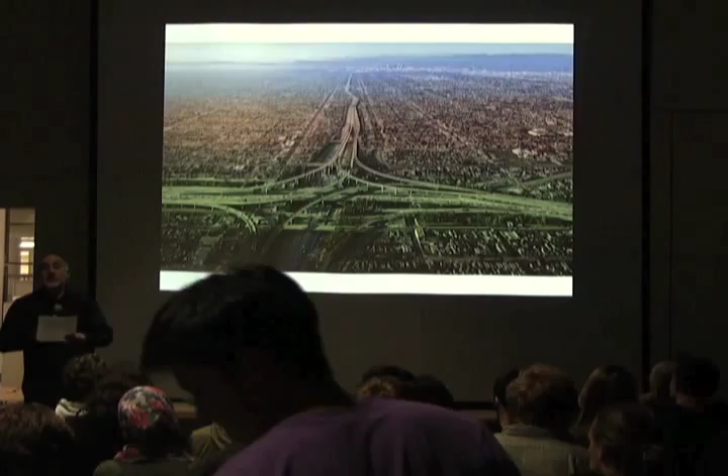The move to LA was a surprising one, but actually a very powerful first step in an amazing career that unfolded since then, and that still draws from the energy of the city, but gives it back much more. There are very few architects today who are able to work effectively with the same powerful hand at such a vast range of scales. Some are good at small, and when they get big, they treat their big as small. Michael treats his big as big and small as small, but his hand is evenly strong at both. LA gives him this variegated ground for the scalar juxtapositions that he masters very well. There are also very few who are able to assimilate into their work a complexity of cultural inputs, from sculpture, painting, but also the practices of walking, driving, seeing, and being seen. And I know there's a lot of that going on in LA. While asserting the primacy of architecture as a framework that holds all this together, not in a hegemonic way, but respectfully and playfully engaging. You will see that.

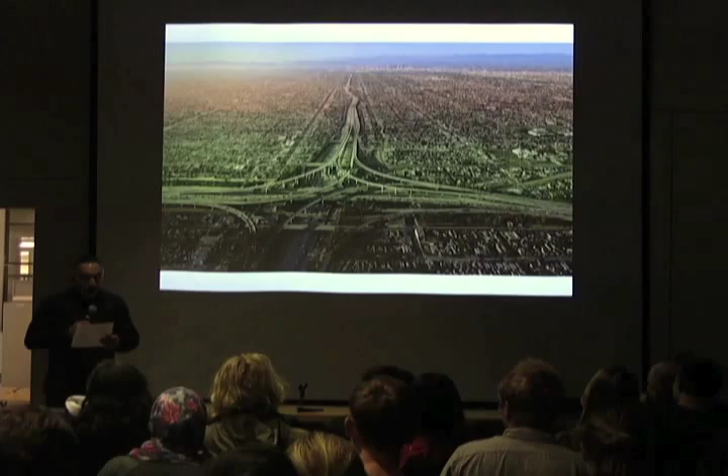The drivers and surfers that are part of that culture see the world differently, and Michael's buildings wink right back at them. There are also very few architects who are able to find room and expression for civicness in all their projects. The way he embraces and highlights and lets the public realm cut through his ground floors and sometimes go higher, and please keep an eye on his beautiful sections. And to find possibilities of civic engagement in a parking ramp or a fence around a schoolyard are always very unexpected and invariably stunning. So for all of this great work, we forgive you the move to LA and welcome you back to MIT.

Thank you, Hashim. I promise all of our secrets are safe.

The idea of this lecture series was a very compelling one to me, the idea of asking the question in architecture of where centers are, if there are centers anymore. To a certain extent, my move to Los Angeles was to get away from a center at that time and to find a city in which the idea of center was very much a challenged one. I would certainly argue that Los Angeles on the question of center is an ongoing discussion, ongoing battle.

That idea of the range of architectural practice continues to be of significant interest, a real driver in my work. In fact, I think for contemporary practice, I'd say I'm most interested right now in range. That architecture, while it possesses incredible, extraordinary capacities towards specialized knowledge and abilities, in many ways, my interest is in architecture's ability as a discipline, as much as a practice, to expand its context, its building types, the forms of its work.

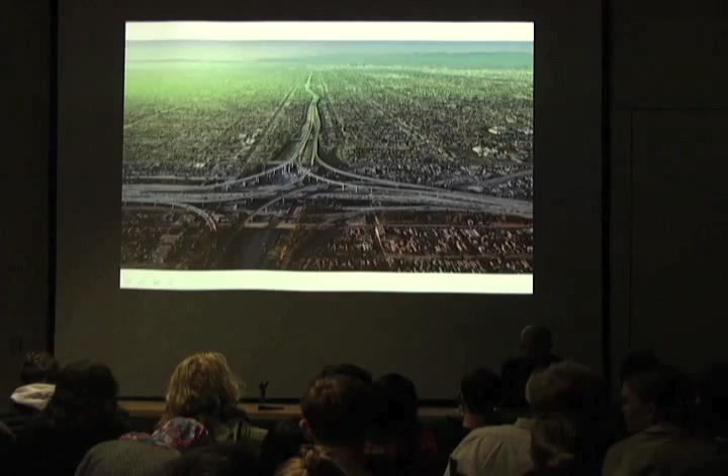I've come to believe that architecture's ability to move beyond the singular building to the scale of master plan, to the scale of landscape, and in some ways to the scale of the social and political engagement of the discipline itself, that in that move, architecture continues to have a very real, challenging, productive and optimistic role in culture today. In that sense, I would say that while I'm still very much interested in contemporary form in terms of what we do, I think I'm even more interested right now in the form of contemporary practice, in its elasticity.

We've been working over the past number of years with a group called the Skid Row Housing Trust, building permanent supportive housing for mostly individuals who are formerly homeless, in an area of the city that's in great transition, the Skid Row district of Los Angeles, which is undergoing extraordinary pressure from almost every direction.

My interest in housing in many ways goes back to my time as a student. Housing was always a significant studio that we took, but even more so, it was that in that typology, modernism, which was something I was very much interested in, had seen as a type the ability to ask many diverse, many complex questions that went beyond form and included questions of social, economic, political engagements. Those mechanisms, which are very much the same types of mechanism that guide the city itself, thinking about collective and community living in the city, makes housing, I think, even more an important typology today.

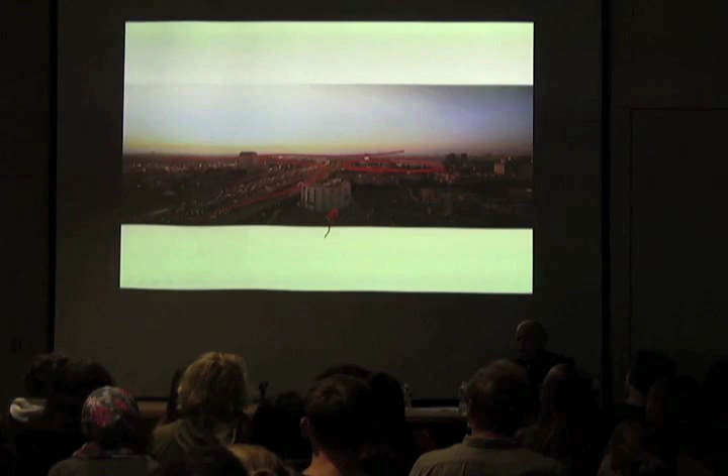If you go back to this image just for a second, this is the building here. This is the 10 freeway going out to the Pacific Ocean, in close proximity to LA Live and Staples Center, which is where the Lakers play, a place that a great deal of the city comes by all of the time. That proximity to the highway, about 30 feet away, was seen as an incredible attribute as opposed to a deficit, because in Los Angeles, our public space is very often the highway itself.

Putting the building in that kind of proximity to the highway meant that immediately you started to create at least a tacit relationship between a community that is largely unseen and the public street of Los Angeles.

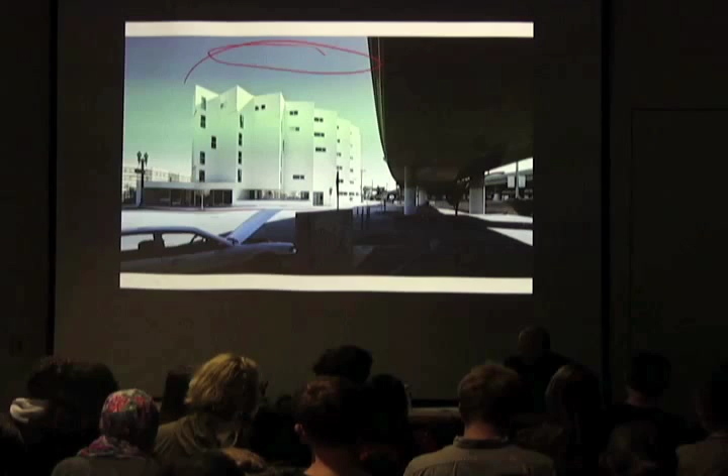That proximity to the highway produced a great challenge, primarily the acoustics on the site, which were so intense that putting housing that close to the highway meant very particular planning for the building. To a certain extent, the shaping of the building, this round form, came from the reality of its proximity to the highway. Working with the acoustician, it became clear that every foot we could get away from the highway meant a drop in the decibel level of the noise we had to deal with. That was important because it meant the construction could get a little lighter, which meant it was more affordable.

But there was another benefit to this proximity, having to do with the visual relationship to the highway, and the shaping of the building into an almost iconic form on the highway, one that related to the sense of movement and motion of the highway. This began to create not only a greater identity for the building, but potentially, in its very form, a tacit conversation between those whizzing by in the car and those people inside the building.

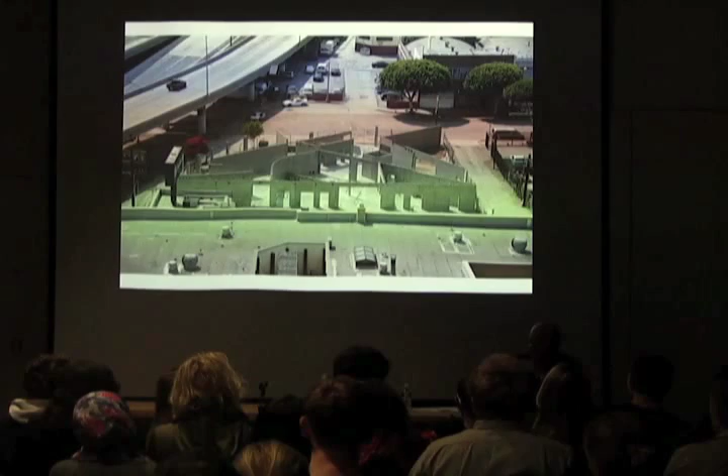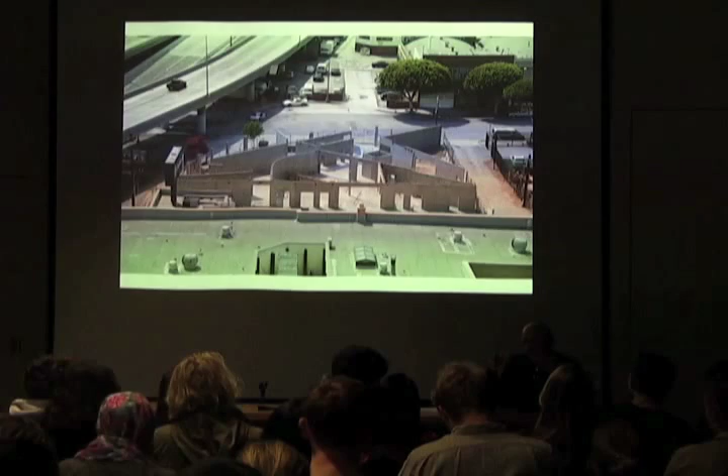I'm very interested in the way infrastructure in the city plays a role, or how its role continues to evolve in a city like Los Angeles. You could say that infrastructure in cities like Los Angeles, which are very infrastructurally marked cities, has tended to do only one thing - getting a car from one place to another, creating some kind of access. But that monoculture of use needs to change. It needs to transform, to take on more responsibilities, given the scale of resources we put into infrastructure, and the scale of the physical impact and footprint it has on a city.

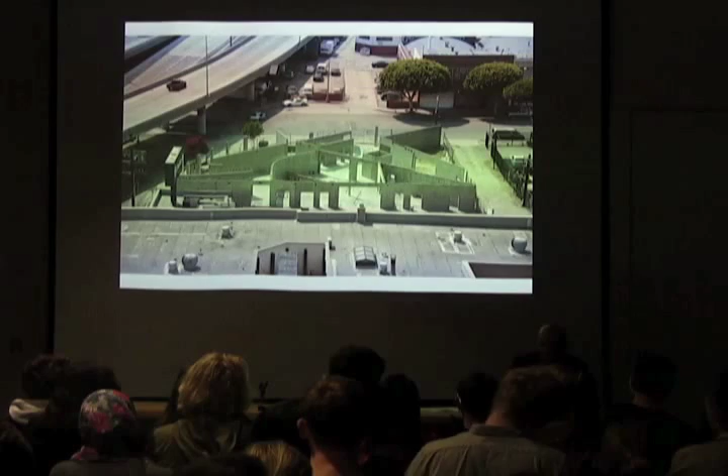Even though this project was separated from the highway, I began to think, maybe even fantasize, that this building, housing, was somehow connected to the highway. It was a bit of an experiment to see if parts of the building couldn't at least begin to insinuate the idea that there was a more continuous relationship between the underneath, underused space of the highway, and the entire ground floor of the building.

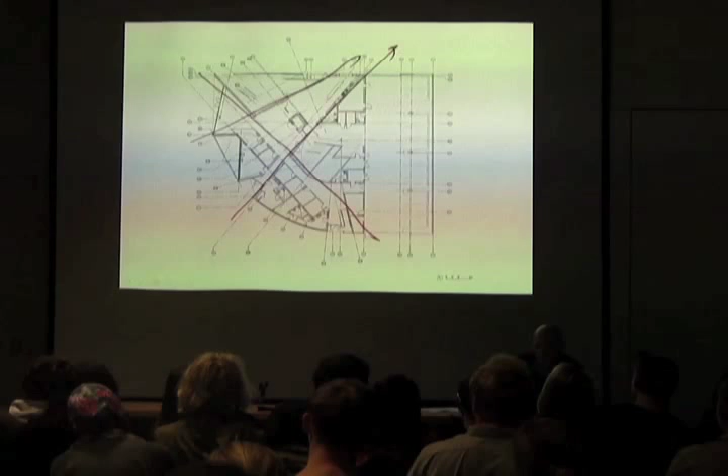The plan of the building is set up so that there are a series of perspective skewers that run through the building, connecting different parts of the site. You can very much see it in the plan - a ground floor that is very different from the upper floor of the drum of the rest of the apartment building, but one that takes its form from these connective views, as if the views through under the highway start to shoot through that ground floor concrete base of the building. As you move up into the building, it takes the shape of its more visible form up above.

All of the apartments, 97 units, are exactly the same - one slice of this serrated pie. They're all studio apartments with kitchens and a small kitchenette on the inside of the courtyard, a bathroom, and then the studio apartment facing outside.

One of the small but consequential inventions in these buildings is that we've moved from a double-loaded corridor, the typical apartment floor plan with apartments on both sides and a corridor in the middle. The problem with this, one of the challenges for this community, is that many people who have been chronically homeless for many years have started to create almost psychological shells around themselves. It's a cruel irony that they've been in public space for so long that the only way of combating that is to create intensely private lives. In the old model, people would come in the elevator, go down the corridor, into their apartment, and you'd never see them again.

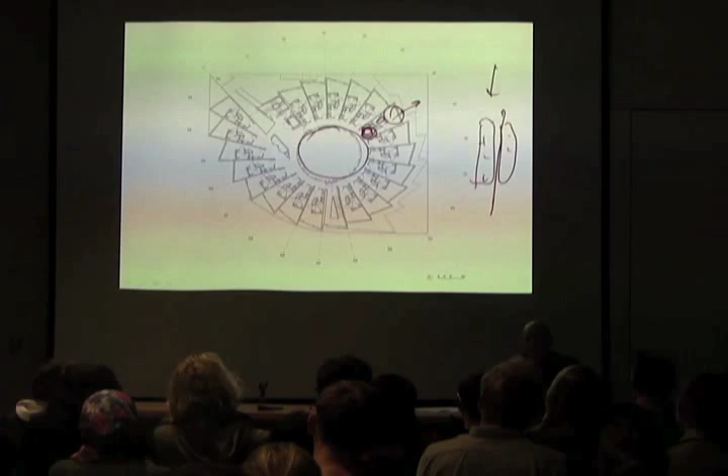What we've done in most of these buildings is crack that open, creating a single-loaded corridor around a semi-public courtyard. So every time somebody comes to and from their apartment, they are, in a sense, navigating a semi-public space, more of a communal space.

While I don't believe that architecture in and of itself changes this deep social dynamic, I think it is one of the ways through planning, that strategic planning, that architecture can play maybe even a more therapeutic role in loosening up that equation.

That inside courtyard space is very much the social heart of the building. At the ground level, there are a series of large stairs that become almost an amphitheater for the community. They do community meetings, they do performances, bands play here. All of the apartments ring around this courtyard.

It's marked by these long fins that were a very important development in this building because the courtyard is so tight, they act a little bit like blinders on a horse, creating more opacity to your next door neighbor when you're inside the corridor, but always allow you to see directly across and connect you to the comings and goings of the community around it.

They also have the effect of, as they spiral up, starting to reflect the light and the color of the sky at the top of the circular form of the courtyard, and animate that courtyard over the course of the day so that its connection to the outside drifts down by that reflected light and color, changing very much the dynamic of the inside of this space and connecting it to the outside, even though the outside of the building in reality is, for a lot of those acoustic reasons, very much an internal set of spaces.

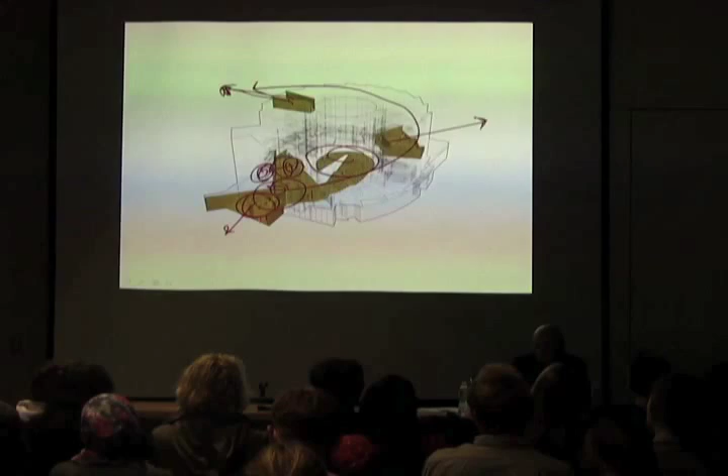With each of these spaces, whether it was the outside lounge, otherwise known as the smoking porch, the TV room and laundry room which face out towards the highway, that center courtyard space, the community kitchen which connects to a ground floor outdoor courtyard space, and then the lobby and meeting spaces directly to the street, each one of them plays a very different role in orienting you away from that internal life of the building back out to the larger community that surrounds the building.

Maybe the most important of those spaces is the TV room and the laundry room. It's one of the places that community constantly goes and spends time. We organized that part of the program at exactly the 30-foot level of the raised highway, as if it's a type of front porch for the building out to the highway.

While in this image it looks like traffic is always moving very quickly in Los Angeles, more often than not, traffic is stopped dead. And it gives that community, in a sense, both of those communities, the opportunity over the course of the day to just see each other.

Again, while I think I'm realistic about the change that a building can make in the dynamic of these larger social structures, that fact of starting to create real visual connection between these two distinct communities is something that I think architecture not only can organize, but also has the ability to start making a subtle inflection in the expectations of what a social conversation might be in the city.

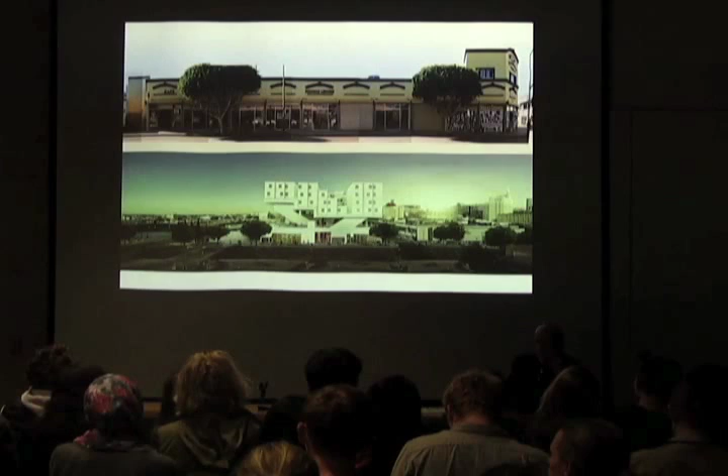They don't want mixed use. You're in the housing business, you should just concentrate on the housing business, and that's all you should do. Because the Skid Row Housing Trust wanted a stronger connection to reinforce life on the street, they wanted to take the very simple measure of putting retail space in the ground floor of the building, and they looked for a loophole, and they found one.

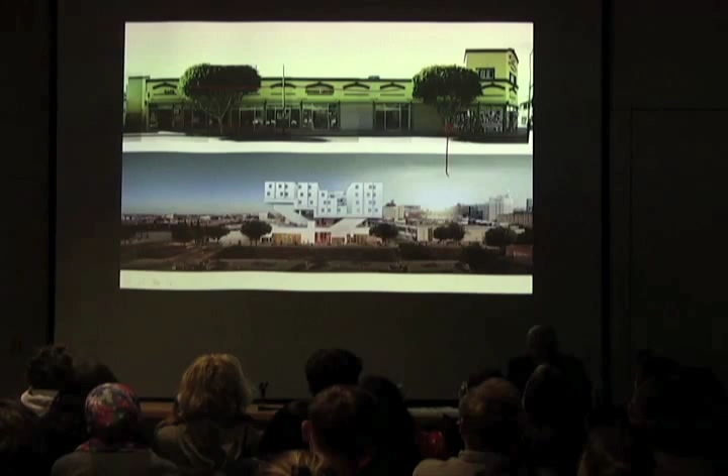The loophole says that if you buy a building that has retail in it, or if you already have a building with retail in it, you can keep that retail going. So they did, in fact, buy a building, which was this one-story, very typical downtown Los Angeles building with parking on top, almost a sacrificial stucco exterior around the outside. Ground floor retail, filled with lots of small mom and pop type shops. This building is a little bit on the edge of the garment district, and some of these shops serve the garment district.

Because of the need to keep that retail going, to fit within those regulations from the housing department, we needed to reuse this building, and you can sort of see it here in this rendering of the project. We did in fact reuse the existing building as the ground floor of the new building.

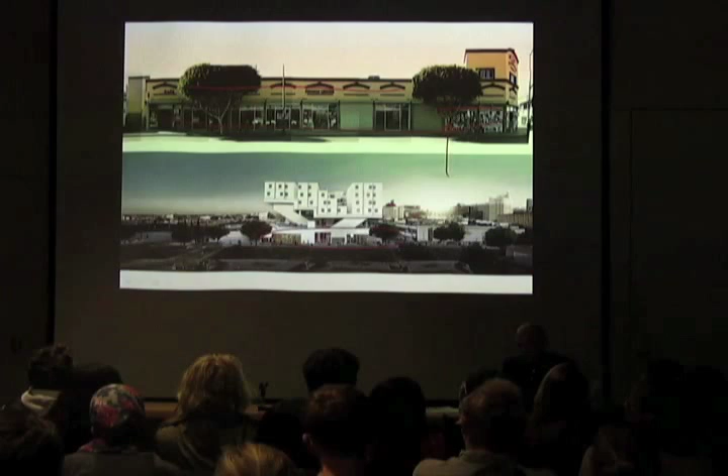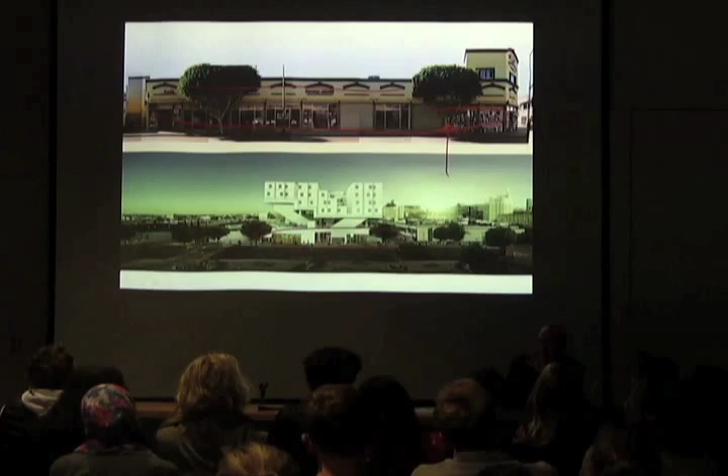That was complicated. It created a number of technical challenges for the building. But this building was in many ways ambitious for the trust at a number of levels, and one of those was not only doing mixed use, but also beginning to talk about a larger question of urban sustainability.

In Los Angeles, this would have been a kind of building that would have been, for the most part, torn down, scraped clean, and you would have built a completely new building on top of it a few years ago. The idea of reusing existing fabric, even existing fabric that seems as incidental as this building, was a big part of the overall conversation of the building.

The second issue that we were starting to take on was this question of density, and what density might look like in a city like Los Angeles, where there really aren't very new models of density.

What I was trying to do in this project was to create almost a kind of hyperdensity within the block. You can begin to see that each of these small towers ring around the courtyard, and there's an additional tower within it, which makes the spaces between the buildings much smaller, much more intimate. You again ring around and walk to your apartments in that single loaded corridor.

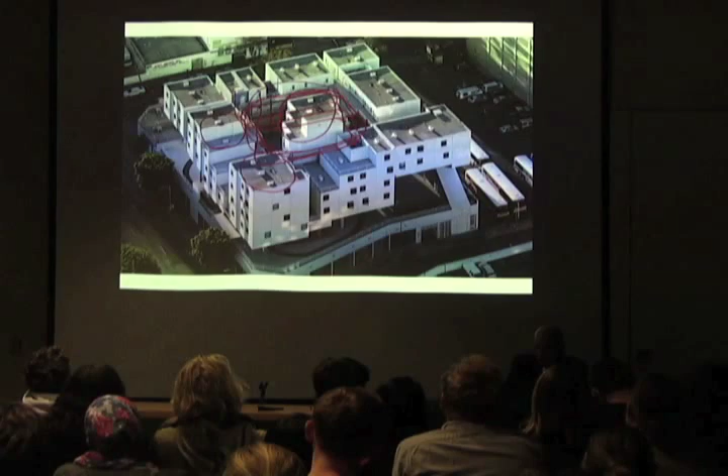Same type of diagram all the way down through the building. But here, as opposed to that central courtyard, you're really in the thick of a dense new type of urban fabric.

Because of that pressure of density and the lack of a more traditional courtyard at the center of the building, instead we started to take that social space and flatten it out into a pancake of different activities on the second floor of that existing building that used to be the parking lot, transforming it into an amalgam of different community activities.

That includes community kitchen, exercise room, recreation room, art classroom, social services offices, as well as a number of outside spaces like half-court basketball, jogging track around the entire perimeter, community garden, yoga, outdoor classroom.

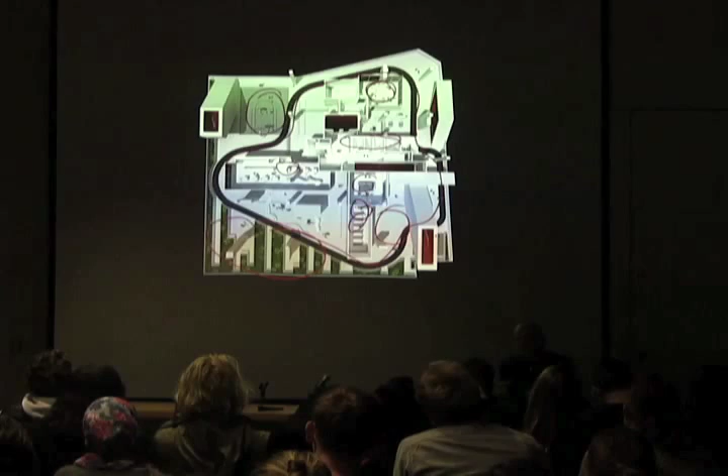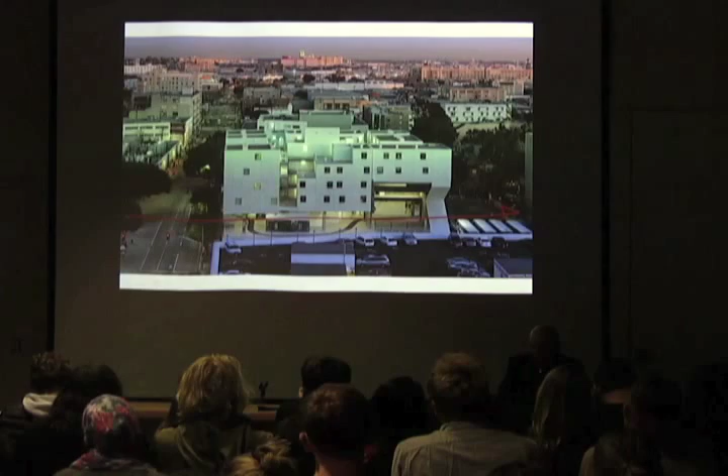That mix of different activities on that second floor of space seems to extend out into this low horizontal district of the city, and into what I think you could even begin to say is that larger continuous horizontal sprawl of the city. This was not only a way of organizing these individual community activities, but starting to see if you could pack them together into a new type of social diagram. In some ways, a kind of microcosm of social activities that started to represent a new dynamic, a new social public dynamic in a singular building.

Because the building was being built on top of another building, and because the site was very difficult to build on top of, we looked at a method of construction that has never really been used in Los Angeles: multifamily prefabrication. There's one other building from the 1960s, about 50 years ago, that used some prefabrication. There are reasons, very arcane code reasons, why prefabrication hasn't been a possibility in Los Angeles, which I'm not going to get into.

But here, we saw it as a huge attribute on a very small site, and a way to stage the construction quickly. All of the units, 102 units, were built in Boise, Idaho, and you can see them coming from Boise here, eventually arriving in Los Angeles. They were built in Boise because we needed to build this building as wood frame construction to fit within certain codes, and in Boise, they do that very, very well.

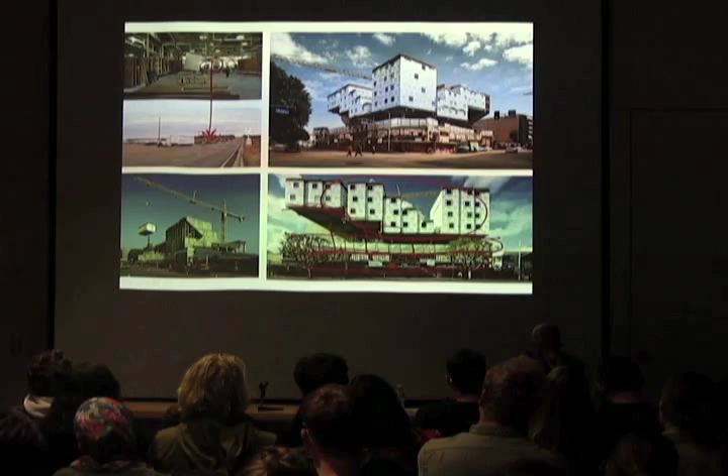Stacking all of the units, once this concrete tray—which was poured and built over that existing building and over that new public or semi-public recreation deck—all of these units were then lifted into place in about four weeks. The units are all very much the same, very utilitarian, but for this community, the fact of having literally a kitchen or their own bathroom space are huge changes in their life.

The building, which you can see here, the ground floor retail is starting to fill in. Its life on the street is very much starting to become an active one. That second layer is starting to become a very active part of the community within the building, and the apartments have all been occupied for a number of months now, very successfully.

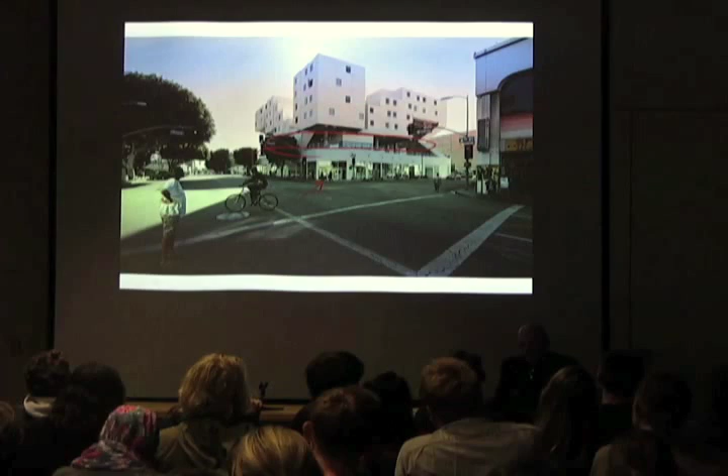This building and its relationship to the city is, for me, one idea about creating a more complex amalgam of parts, to begin to represent and start to experiment with how architecture can be, in a sense, almost an urbanism in and of itself. But the scale of this project is still very much at the scale of a single building. We recently completed a building which starts to take many of these same questions and challenges them more at the scale of the city itself.

One Santa Fe is a mixed-use project, in this case a private development, for-profit developer development. It has 440 units of housing, and the entire ground floor is retail, about 75,000 square feet, along with a great deal of parking as well.

It's in an area of the city not so far from Star Apartments and Skid Row and downtown, but in a very different condition—not so much in the middle of the city, but much more at the threshold of the city as it develops. This whole neighborhood is called the Arts District. It's a warehouse district that contains slightly larger, loft-like buildings that much of the creative community in Los Angeles has lived in over the years.

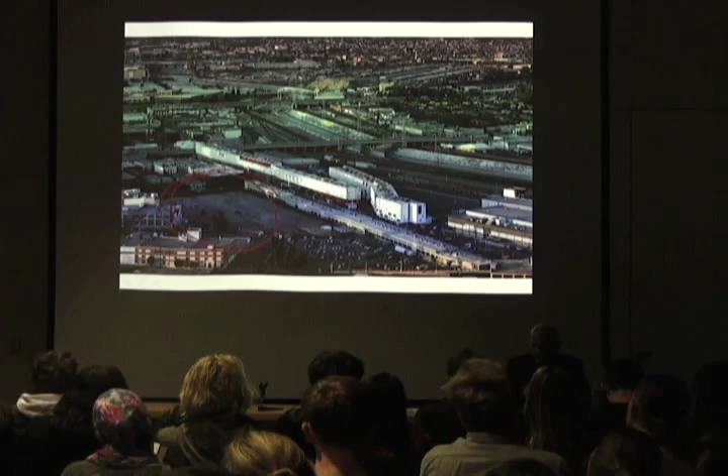It is immediately adjacent to the Los Angeles River, which is undergoing, or about to undergo, a significant revitalization in partnership with the Army Corps of Engineers. It's just across the river from East LA, which is the heart of the Latino community in Los Angeles, which is now the majority community and very powerful politically in the city.

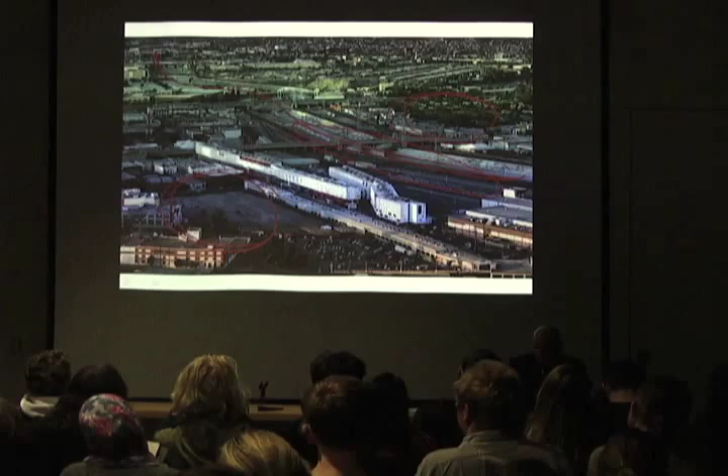As an aside, it's right next to SciArc, another architecture school, which is a long, skinny building. The site that we were given—this is just an image to give you a sense of the scale, and also to reinforce the fact that I've always wanted to do a skyscraper but never gotten a chance. So if you tip it up on its side, it's, I think, the 7th tallest building in the world.

This site is really marked by the fact that infrastructure has been the thing that has created the grain, the scale, the image of the city. SciArc, which is here, was formerly the longest building, I think, in the city—it's an old rail depot from the Santa Fe lines that ran through this part of the city.

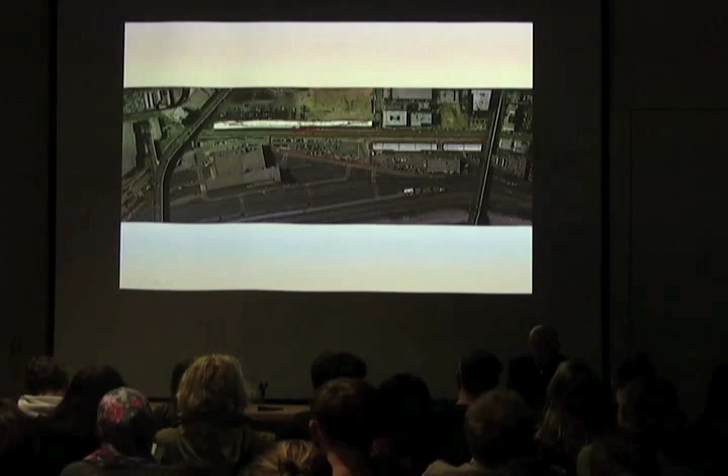There's still an incredible number of rail lines, including the MTA lines, Amtrak, and Union Pacific, amongst the different rail companies that run through this part of the city, as well as the 1st Street Bridge to East LA and the 4th Street Bridge. That sense of the long and linear structure to the city certainly gave rise to some of the form of the building.

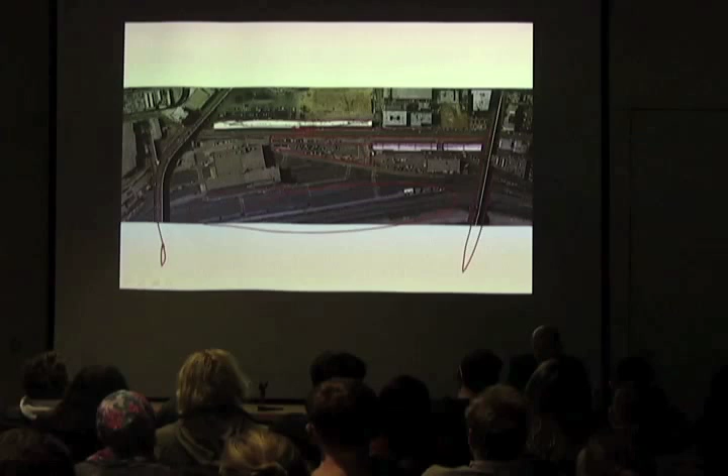But much of it came from just the fact of the unusual configuration of the building—a little bit wider to the south, and then very, very thin up against this maintenance building, which needed to remain as an adjacent neighbor.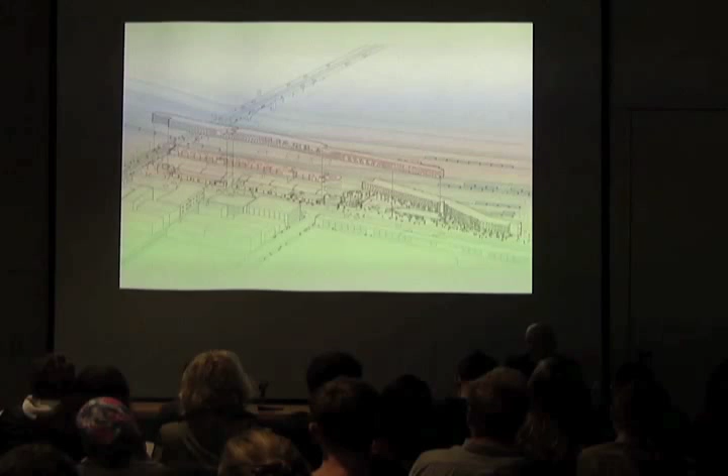The diagram of the building, the planning strategy, is very much a layered or sandwich-like vertical disposition of the different programmatic layouts.

At the ground floor, as I mentioned, it's almost all mixed-use retail that stretches from the First Street Bridge on.

On the second level, on the northern part of the site, because we couldn't build the parking underneath adjacent to that existing maintenance building, there are two layers of parking sandwiched in between, so they float up above and are accessed by these large spiral ramps, which start to create markers as you come down either First or Third Street. Then housing up above, either 5 levels to the south or 3 levels above the parking.

One of my thoughts in this project, which came in many ways from the previous project, Star Apartments, was that in developing densely in the city, there are many ways of going about it. Certainly you can build up in that skyscraper or tall building scenario.

But maybe there's also a way of thinking of the city when it's more horizontal, building over that lower grain, in a sense creating a kind of palimpsest or additional layering that ties the city together in a very different way.

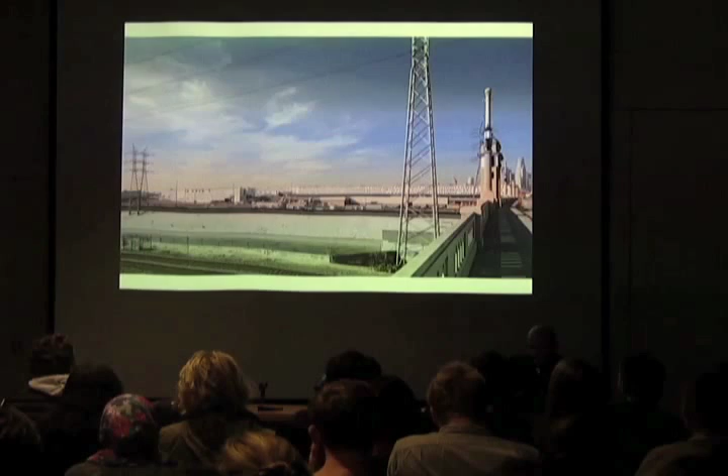But as you look back to the building from the other direction, across the river, across the rail lines, across the power lines, it has a very different, almost industrial quality as well, and its full length starts to become much more apparent.

At the ground level, at the street level, you can see the parking above. There's just a sense of the retail here. Much of the retail in these photographs is just getting built out. The building is, as I mentioned, just being completed, ground floor all the way down the street, SCI-Arc on the right-hand side, and then the apartments that slice over the top of it.

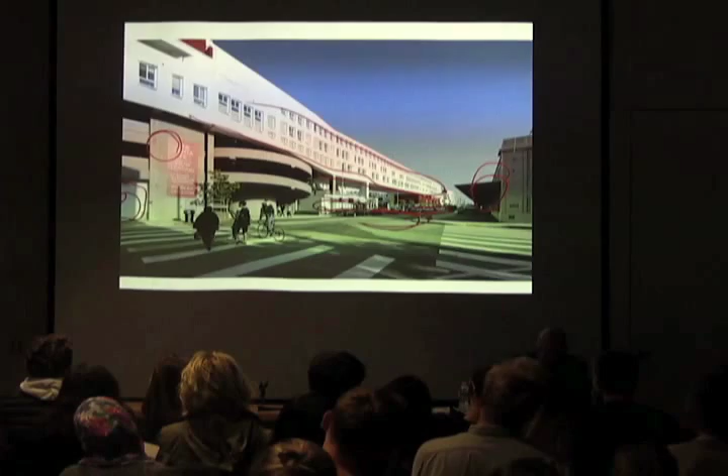There is an important portal where the building turns, not so much a building that hits the ground, but into more of a bridge that creates an opening from the street into these internal courtyards, where the scale of the building starts to change to a more meandering movement transversely down through the building.

Again, where the ground floor retail takes place, you can see out to SCI-Arc. SCI-Arc, in a sense, almost completes the urban wall of this interior space.

And then a parking lot at the ground floor, which is a flexible parking lot. At times, parking can also be used as a central plaza for the complex.

It's another view of how the scale of the building begins to change or break down into a finer grain, including through these balconies and passages to the surrounding neighborhood.

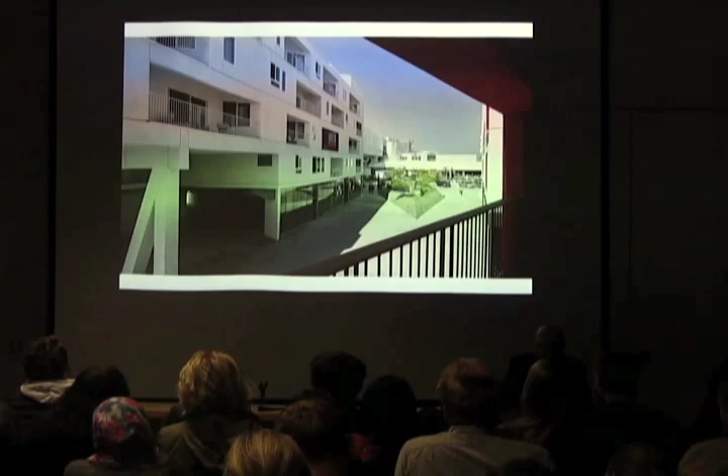Maybe, while the scale of the building at the city level is certainly at a visual level one of the most insistent things about the building, but maybe one of the...

...most important things about the building is the diversity of apartment types and scales of apartments that it sets up. We were trying in this building to create as much diversity to the community that would live there as possible. And there are many ways of doing that, certainly economically.

There's been a conversation about how you integrate affordable housing into apartments. Here we were literally trying to do it with the scale of apartments themselves, everything from smaller micro studios to very large 4-bedroom units, with 2, 3, and 1-bedroom units in between.

And that range, that diversity of different units, while unusual in a typical developer building, has allowed for individuals, groups of individuals, students, to find inventive ways of creating relationships to rent these apartments, including some of these 4-bedroom units where 8 people have gotten together to live in them. There are some units in the bridge which are more of a skip-stop configuration, similar to Corbusier's Unité units, where there's one corridor down the middle, and then you come in and either have a 1.5-story unit up above or down below.

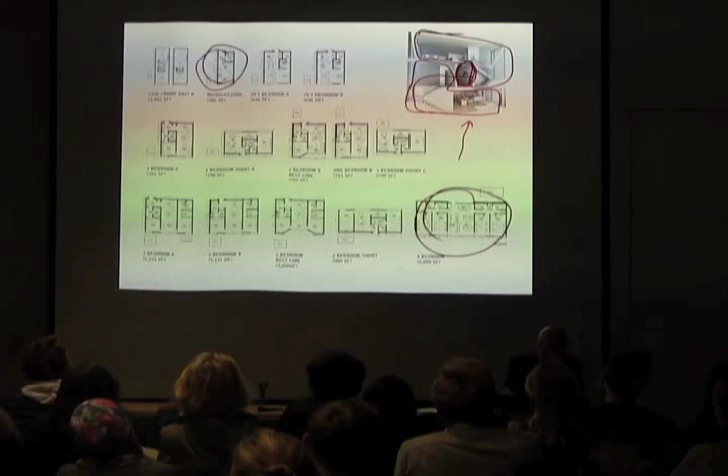The advantage of these units is that you're able to see through both sides of that bridge from downtown all the way to East Los Angeles. That bridge creates a very strong gateway into the middle of the building.

But our ambitions here were not to stop in the middle of the development. The ambitions of this building as more of a threshold building, as a kind of gateway to that emerging development of the river, and potentially connecting all the way to East LA at some point, was very much on my mind as we were beginning this project.

We developed a conceptual set of bridges which at the time seemed preposterous, all the way to the river, but now with the development of the river it's starting to be revisited.

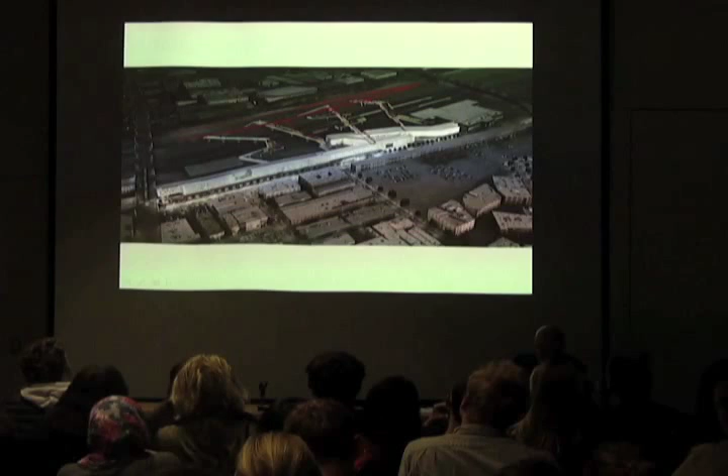And here's a point that for me is very key to this project, and that's a question of anticipation. We've been criticized at some level, not too much in this project—it's been received very well in general—but there has been some criticism that the project is too big for this part of the city, and I understand that criticism.

At the same time, much of what we were trying to do in this project was to create a kind of anticipatory scale, a scale of the building that was not trying to meet the city where it is today, because in a city that is developing as rapidly as Los Angeles, to meet the city today likely means that tomorrow you've missed the change in the city.

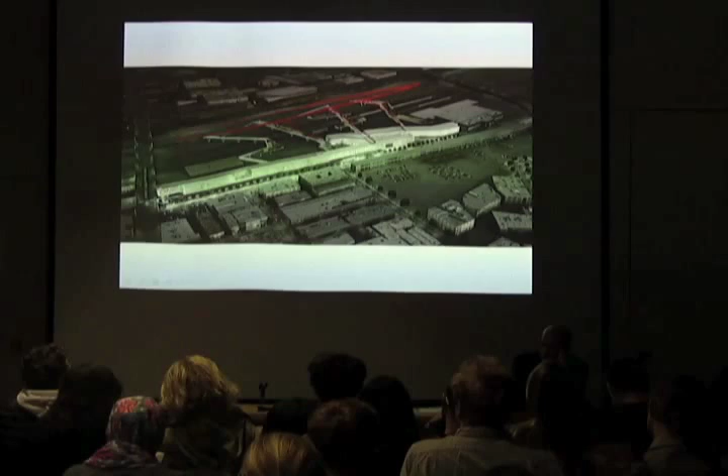But in fact, to meet the scale of the city in 10 or 20 or even 25 years is, I think, a responsibility in architecture—to not only plan for how a building relates to a particular context now, but to understand architecture, especially in the city, as a component of master planning for the long term. That architecture will, over the course of its life, have a changing set of relationships as the city builds around it.

And even all of these projects I was mentioning—whether it's Carver Apartments, Rainbow Apartments, all of these little dots, and the Sixth Street Bridge project we're doing—over time, beginning to understand them not as individual projects but almost as a web of relationships that builds up over time, is quite interesting in thinking about larger planning in the city. People often believe that projects like the Staples Center or Convention Center are going to, because of their large gravitational scale, save the city.

They're going to change the city for the positive just because of their bigness, that they have so much influence in the city that they will ultimately change it for the better over time. And maybe that's true, but just as often those projects miss the way that the city is developing.

What I've really begun to think is that not only is the scale of a development like One Santa Fe important, but these types of webs of relationships and the scale of a project based on the accumulation—the iterative or temporal accumulation of all of the parts—has just as large, if not an even more beneficial, role in the city.

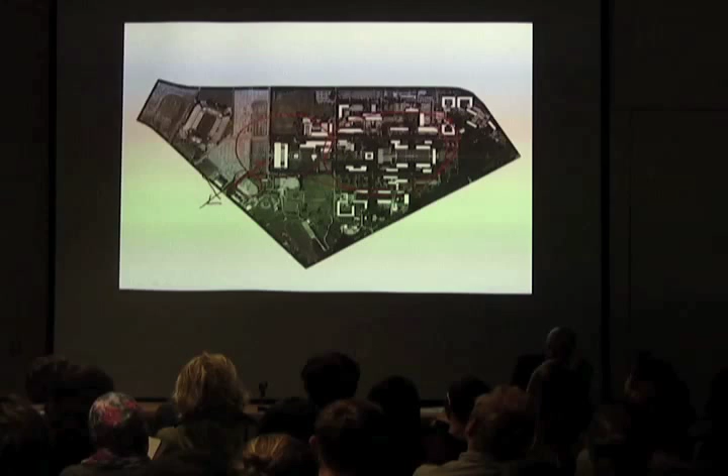We're working on a project that takes some of these same ideas and begins to revisit them in a single building, but in a very different context. That's a project called the Moody Center at Rice University in Houston. The Moody Center is going on the edge of the more traditional campus of Rice University, at a gateway into the campus, which is increasingly becoming one of the major gateways into the city as the development of the campus moves more in this direction. The Moody Center is a new type of program for the university.

It's not one department that will run this center, but it's meant to be a truly interdisciplinary building. Rice University believes there is great promise in bringing together many different disciplines from around campus and outside of it, in the city of Houston as a whole, institutions like the Museum of Fine Arts and other universities, curating these different groups and giving them space to make projects over the course of a semester, a couple of weeks, or a year. This building is taking the energy from many different intellectual centers and trying to bring it together, equivalent to the campus as a whole.

We took that idea and imagined, almost fantasized, that if you collapsed all of the buildings of Rice, squished the public space, quadrangles, and open courtyards together, you could begin to think about the engineering department, the art department, and the international studies department clipped together to become the building itself. Rice is marked by long, linear, bar-like buildings, so the Moody Center becomes a series of these longer linear forms that relate in scale to the existing buildings at Rice.

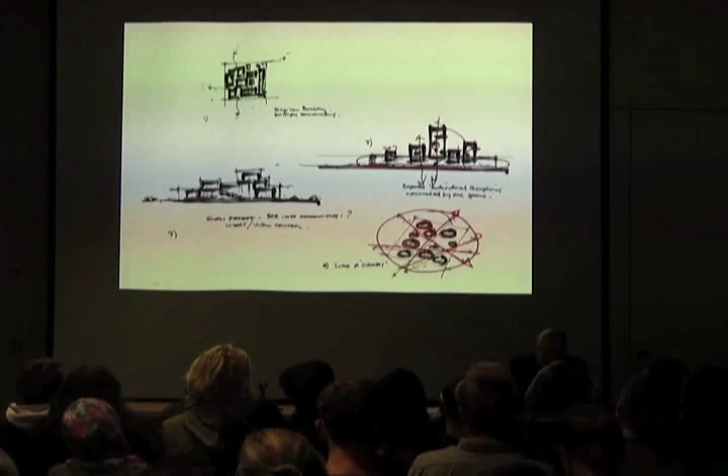There's something important too: the campus of Rice flows to this part of the building. I started thinking about whether the ground plane, the landscape of the university, could slide under all of these buildings, creating a relationship vertically as well as horizontally. That ground floor, with these different intellectual centers, could be both transited, as if the campus had a very open, porous relationship to the building, as well as denser, floating up above.

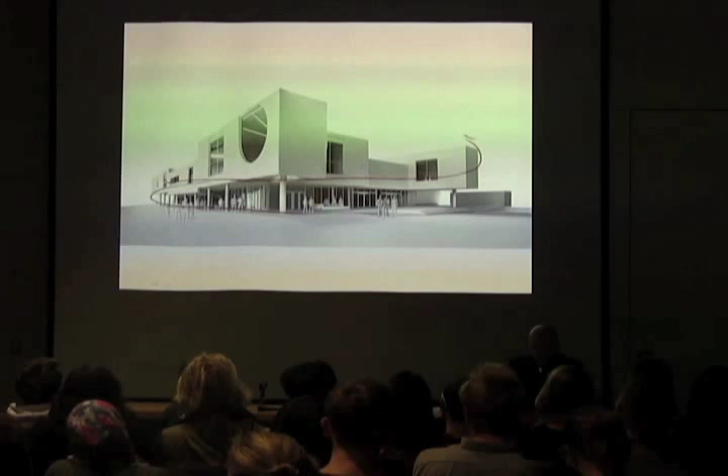We started with a series of collage diagrams showing historic photographs of learning and engineering spaces on campus, with oak trees very dense up above and very open and visible down below. The building is quite literally the equivalent of that: a denser building up above with a completely transparent ground floor at the level of the campus.

One of the requirements for this building was that the entire campus is brick, and I'll talk about that more—this is the first brick building we've ever done. So there's a very strong separation between this heavy, dense brick series of forms above and the lightness of the ground floor.

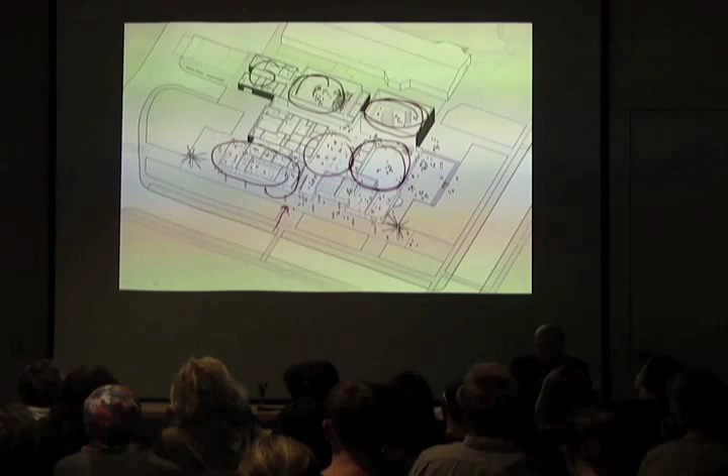This is the axonometric of the ground floor, giving you a sense of the very different types of program: a gallery run jointly with the Museum of Fine Arts in the city, a flexible student-run gallery, larger studio spaces, a 99-seat black box theater with some back-of-house spaces, and this entire wing, all glass, containing more traditional shops as well as digital shops—everything from woodworking and sewing to metallurgy and three-dimensional digital fabrication.

As you move up into the building, some spaces are quite tall—double height, triple height—and then smaller, more intimate classrooms and office spaces, with medium-sized offices above. If you peeled away the outer skin, the inside is almost a three-dimensional topography of different open and closed learning spaces: large studios, a flexible gallery, and connections above, including in this case a large stair that can be used as a teaching classroom in itself.

Here's an interior view of that space, showing the range and different feeling of the interior classroom spaces.

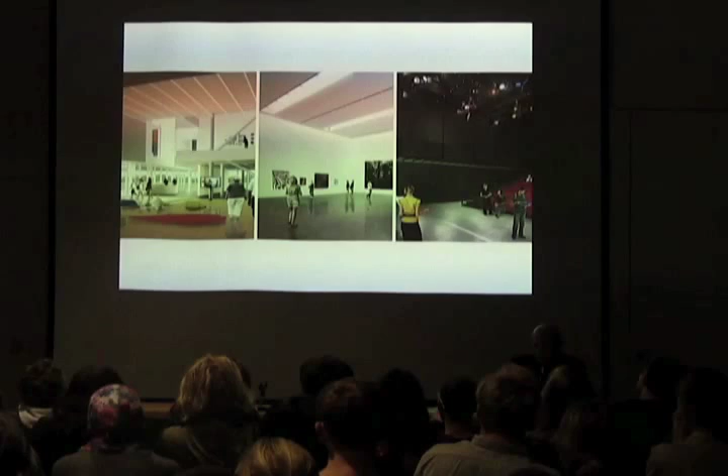I mentioned the building was required to be brick. Most of the brick on the Rice campus is in that color, but because we're a little off the main quad, we had a lot more flexibility on this project. I got very interested in making a building that was incredibly luminous on the inside, almost like a series of galleries, white boxes, white cubes within this darker shroud on the exterior. The brick we're using is a manganese brick with a sheen that changes significantly over the course of the day.

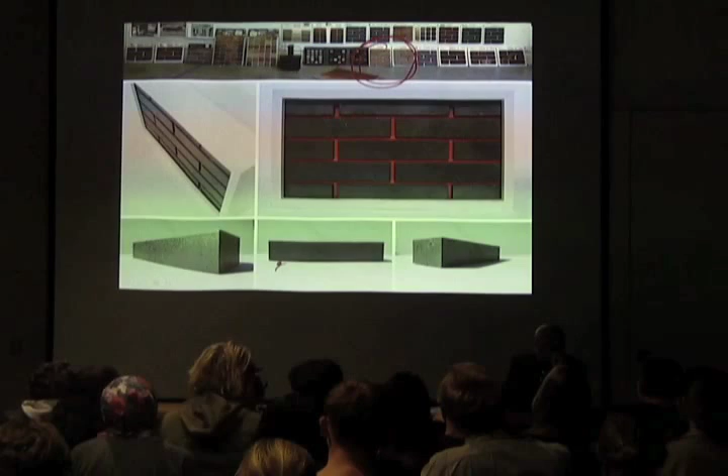It goes from a very blue color to a slightly warmer color over the course of the day, depending on what the sky is like, and then a very deeply raked pink grout set back from the facade. What that does is that from certain directions, as you come on the building obliquely, I think the brick will appear to be very much an intense, dark solid.

But as you move around it and start to see the grout, that warmer color of the grout against the cooler color of the brick starts to become much more visible. So that heavy form has a real dynamic to it, almost a choreography to it as you move around it on the campus.

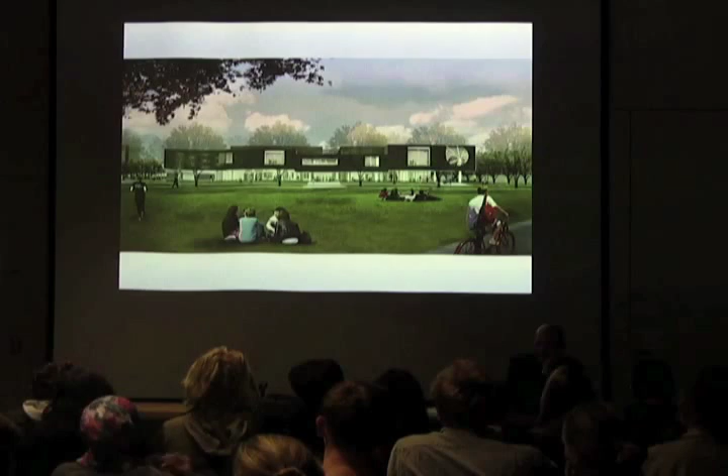You see the building, how it floats above, and the more luminous quality of the inside starting to pour out onto the campus. There are moments of the brick which turn into screens, so that along walkways and arcades in the campus, you're halfway inside and halfway out of the building, and that heaviness of the brick gives way to a transparent, almost veil-like sense of that exterior skin.

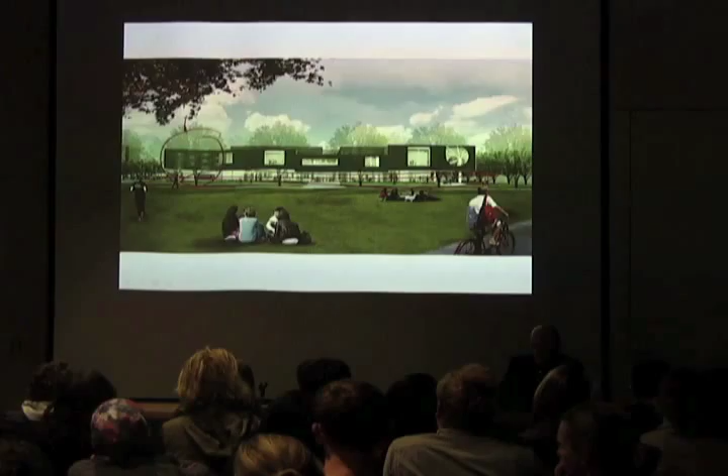Campus and landscape is something increasingly interesting and part of our work. Maybe it grows out of an idea that in a city like Los Angeles, landscape is so much a part of the sense of urbanism. Certainly there's been, at a disciplinary level, a great mutual interest between landscape and architecture, as ideas like landscape urbanism become more and more a part of the conversation about how we think about urbanism.

A couple of years ago we completed a park in an area of the city called Playa Vista, which was mostly undeveloped. It's the old Howard Hughes aircraft site, where things like the Spruce Goose were developed, and a lot of engineering and aeronautic work took place, especially during and after the war. At least in the eastern portion, it's been developing over the past five or ten years into more of a residential district, very much in a new urbanist model.

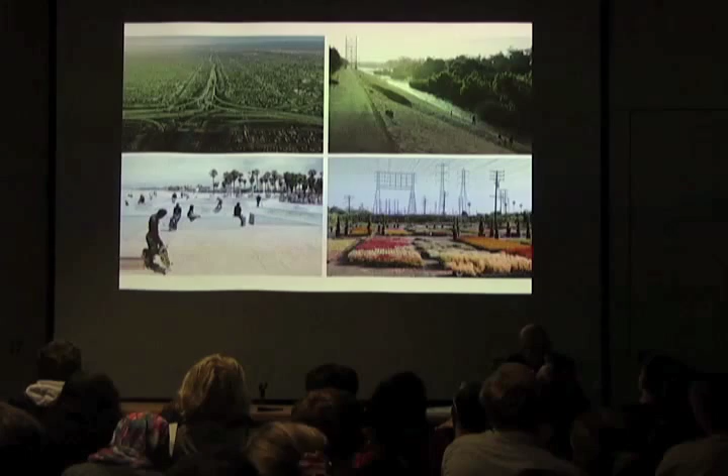I'm interested in the idea of landscape, not so much in a classical way, a park to be experienced as an equivalent to nature, but more as a processional equivalent, or an alter ego, to the city. In a city like Los Angeles, or any contemporary city, the idea is to try to create an equivalent, not the same, but a kind of equivalent to the city and the park, as if you took a series of these different experiences and activities and put them together into a type of bento box of experiences.

These are images that the architectural photographer Iwan Baan took for a book I did called No More Play, which in many ways start to create a real visual equivalent to those multiple types of landscapes and activities that exist in a place like Los Angeles.

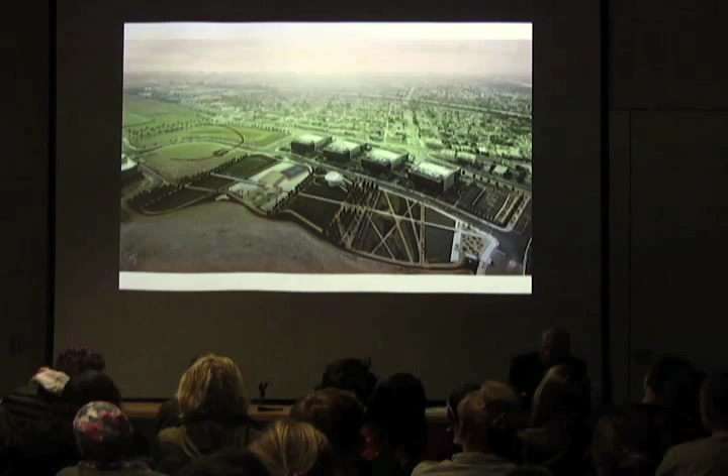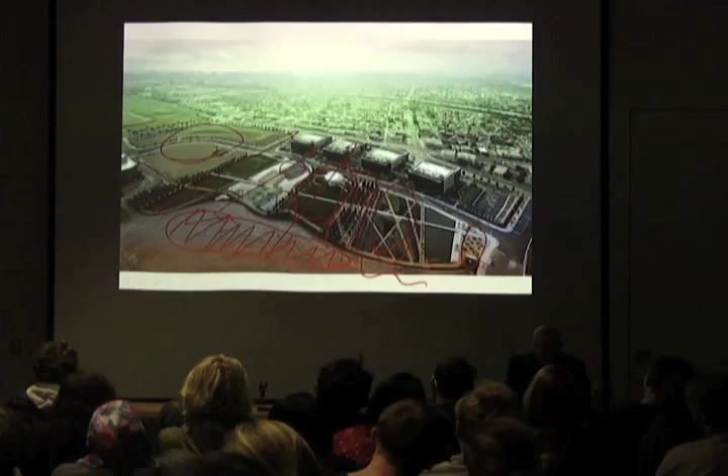The buildings I mentioned that we're doing are out here. This whole site, which looks like the desert, is now almost all filled in. The park is organized as a series of activity bridges that connect the two sides of this campus, each one having a very different activity: a horticultural bridge, a large amphitheater bridge, basketball, beach volleyball, children's playground, a lawn sports bridge.

These are the horticultural gardens, a place you can just meander through, but also a place where horticultural classes take place. And there's a shade sports bridge, where there's everything from bocce and horseshoes to just quiet sitting.

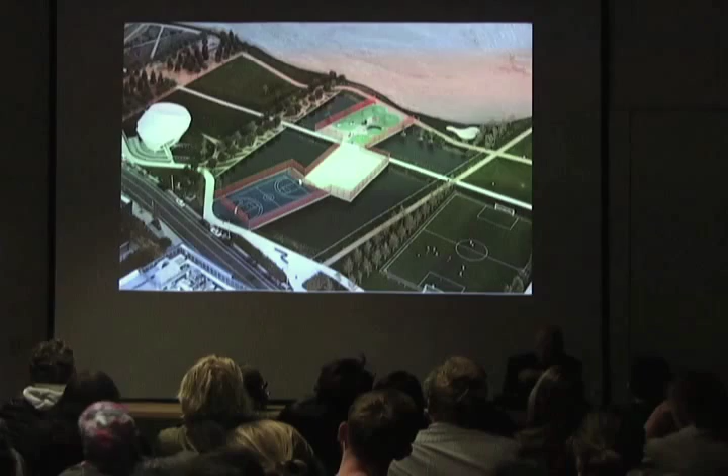Increasingly a place where small meetings take place outside of the buildings, so that it becomes an extension of what happens inside. Each of these different activities, like basketball or beach volleyball, have lives that are extensions of the kind of 24/7 life that occurs inside these creative industry buildings, which I think is increasingly the way that lives are manifest.

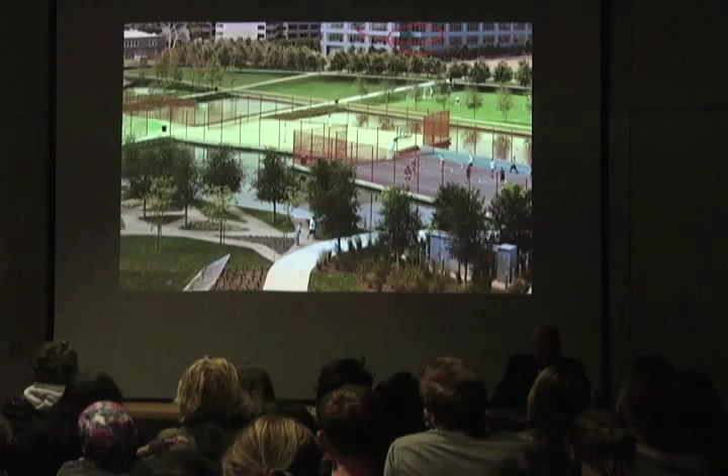In the blurring of work and living, if anybody in architecture knows exactly what that means, it's that your life inside the studio and your life outside the studio are very much intertwined. Here we were trying to make a space that was not separate from the life inside these buildings, but was almost a way of seeing the park as an extension of those activities.

The bandshell is maybe the structure most equivalent to what we normally think of as architecture. It's meant to be a place for performance, even impromptu performance, but it's also very much a meeting place in the park.

It's structured as a three-dimensional space frame connected only at the very base, as if it's like a clamshell that's opened up. It's a fabric structure that at night lights up, and that fabric skin over the three-dimensional frame gives you a very different sense of the building as it moves from solid to more animate form, where the skeleton of the inside starts to become the most important characteristic.

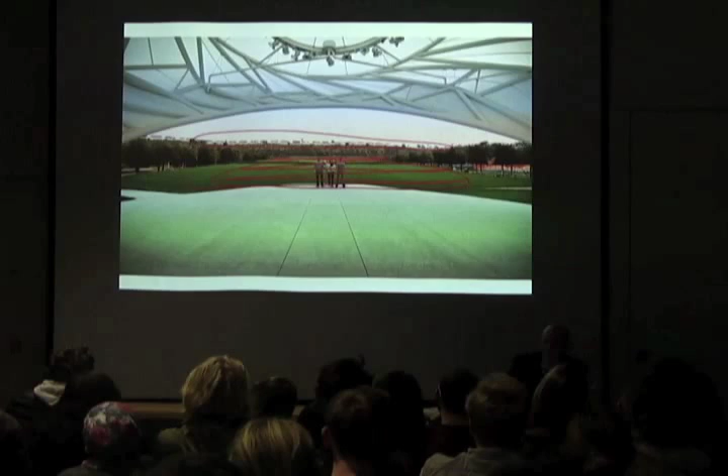I like this image because it not only gives you a sense of the inside of the shell, but when this space starts to fill up with audience, it starts to connect almost to the balcony of houses up above, which are the more typical traditional urban condition in Los Angeles of all those single-family houses. Here you can almost begin to fantasize the connection between civic space and private space.

I want to finish with two projects where the scale of some of these ideas between landscape, planning, architecture, and the city expand. The first is a project in St. Petersburg, Florida, called the St. Petersburg Pier. It was a competition we won to replace the existing pier on this site.

The existing pier is very much an existing type of pier, a kind of lollipop of experience—you come out, see the water, and go back the same exact way. Very discrete and separate. Instead, what we proposed was a pier that began to unfold in this figure 8 of movement that would then connect to other parks in the city.

As opposed to architecture being the object at the end, instead the water, which is the most quintessential characteristic of St. Petersburg, becomes the thing at the center. Here you begin to get a sense of that diagram as these different loops expanded all the way back to a central lake at the center of the city.

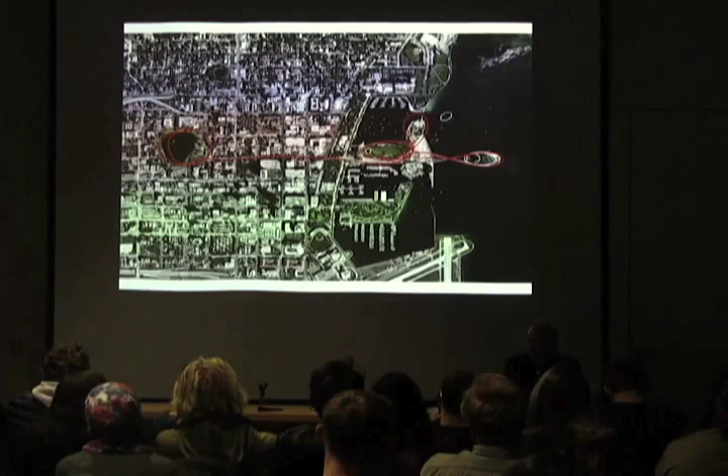The conversation about the project is no longer between a singular client and the architect, but is a much larger conversation within a context like the city of St. Petersburg, where it's almost more the context for a conversation between the citizens and the government of the city itself.

That conversation became very contentious, with the pier becoming the flashpoint, the illustration of a great deal of concern about the way the city was changing from an older version of the city to a new and dynamically very different type of city.

The project ended up going to referendum, which was really a referendum about the city government, but was unfortunately worded to say that if you voted no, you were voting to cancel Michael Maltzan—not the contract with Michael Maltzan, or the contract with Michael Maltzan Architecture, but to literally cancel Michael Maltzan, I guess, himself.

And the project was voted down in that referendum. I'm still around, so somehow I got out of that.

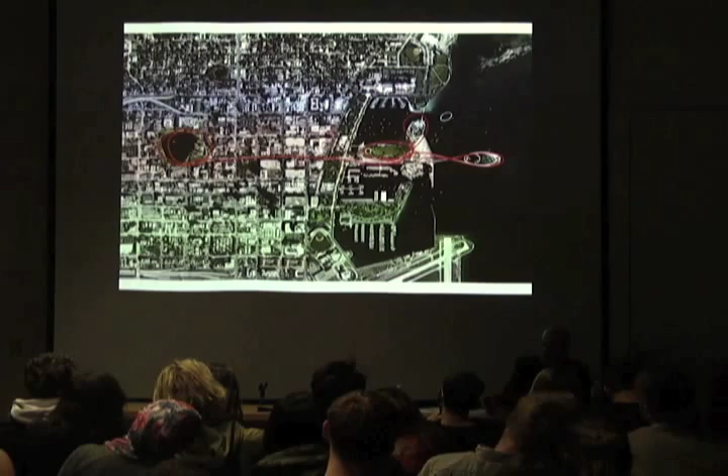The extraordinary thing, in a sense, was to understand, to see firsthand a dynamic in which a project that was so much about creating a space, quite literally, for the conversation to take place about the city, became the thing that was the illustration, not only of that conversation, but, well, the negative side of that conversation for the project. Still, many of the ideas of this project, in which architecture attempts to become iconic in and of itself, stand for something, be very identifiable, but also make space the primary thing, make something as ineffable as the changing quality of the water very much the center of the city, is a very compelling one for me.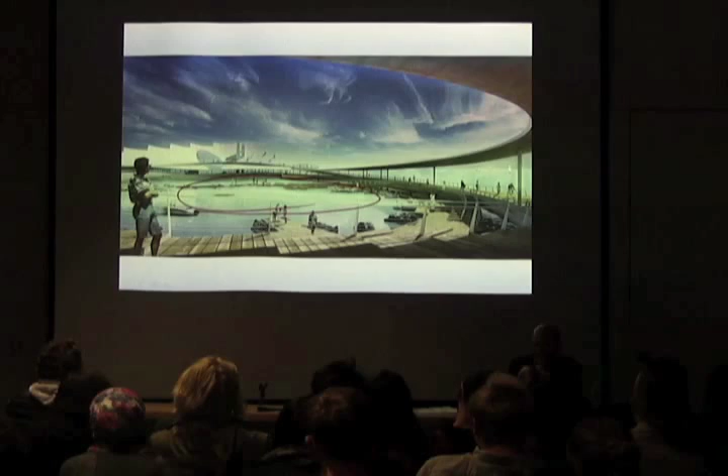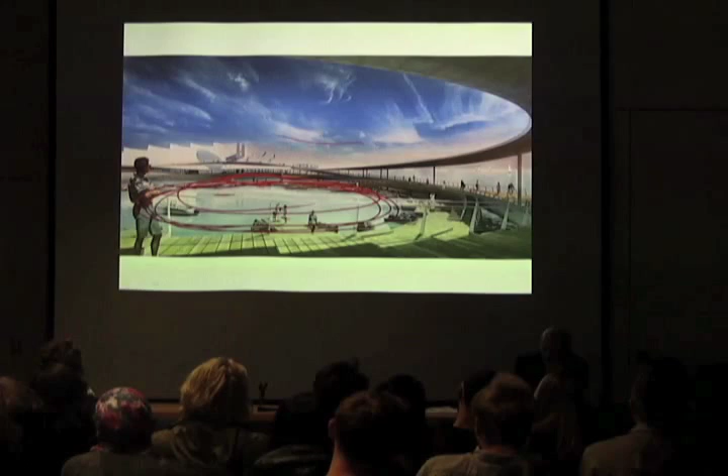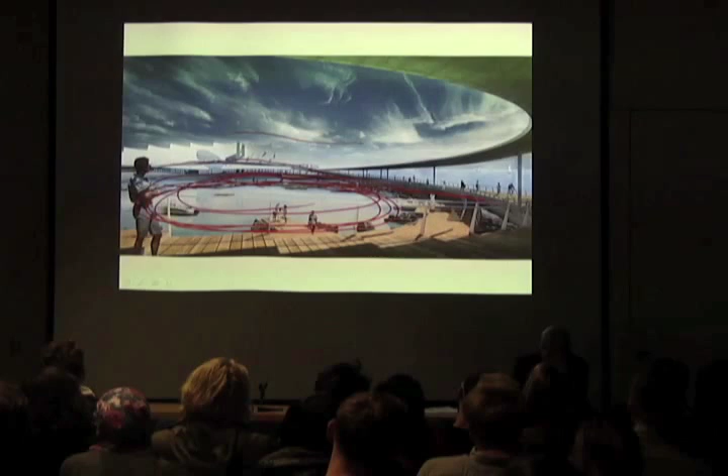Here, that had a number of different activities. There was a small beach, a small watercraft pier, the lagoon, which was a teaching space with docents at the center. The canopy got quite large as you went out to the very end of the pier, creating shade and protection for a restaurant, a gelato shop, and a fishing pier. You could also not just transit around the shell, but bicyclists, rollerbladers, and joggers could come up onto that shell.

So that quite literally the surface became occupiable and active as well. I mentioned this is the social part of the city, and this is also the obligatory fireworks shot for that kind of space. But it does start to reinforce, I think, the scale of this type of space, where this type of activity could take place and become the place not only of daily life, but celebration for the city.

Up on the canopy, you had views back to the city, the dock space, some of these teaching spaces. When the tide went out, there were loops that allowed you to go out to the remnants of the old pier, where there was coral and wildlife.

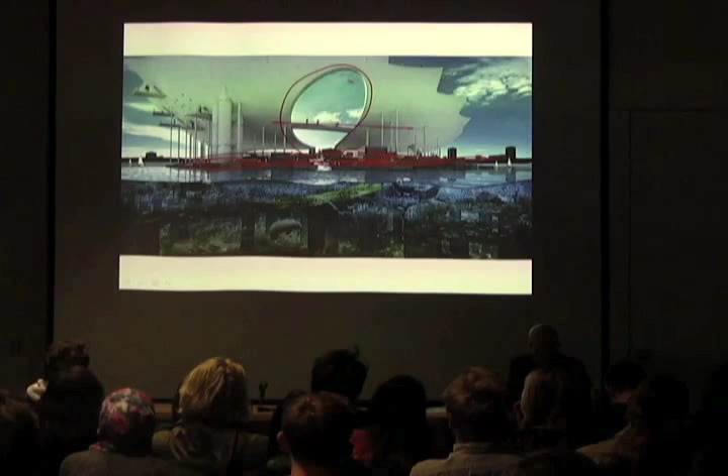As you approach the pier from the outside, the activities I was describing, the restaurant, the ice cream shop, down below in more of a jetty, the ramp came through this large opening with views to the inside and outside of the pier, and then these smaller balconies.

And while the idea of the pier was for this larger collective space, there were also moments where smaller groups, whether a family or an individual, could come out to these balconies and have a more one-to-one, intimate relationship to the horizon of that waterscape.

The thinking about that project has been very consequential for the last project I want to show tonight, a project just about to start construction, the new 6th Street Bridge Viaduct in Los Angeles. This is an older picture.

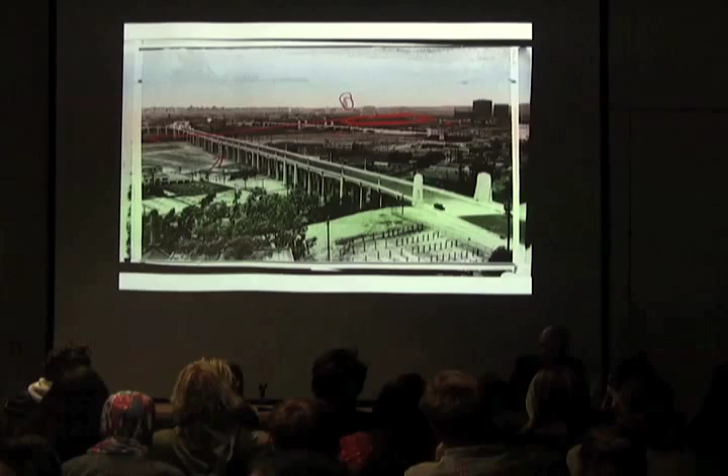This is taken from the east side, looking back to what is now downtown in the city. The river, before it was channelized post-war, would flood, and there's a very wide basin that would create, and that's why this bridge is raised and is in essence a viaduct. The crossing of the river is only at this one point.

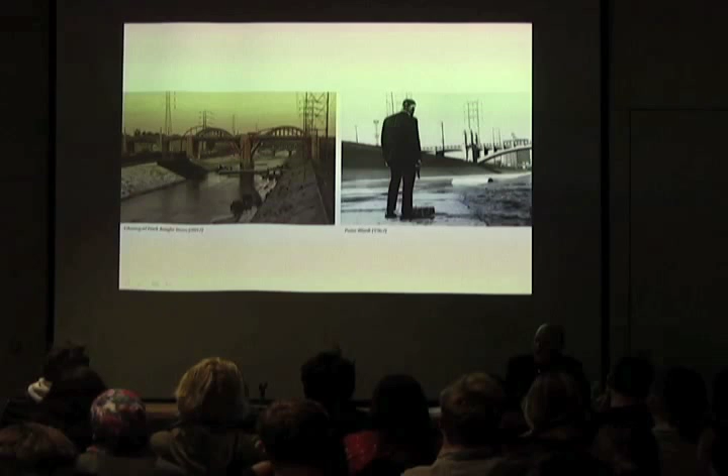And that existing bridge at that crossing has these two very iconic arches, which many people in the city and outside the city know, because this bridge has shown up in so many films, music videos, and television commercials, especially car commercials. It has, though, often stood in as a kind of set piece for a deeply dystopic, troubled, urban, and rough, gritty part of the city.

Though because it has such a strong visual connection to what people think of as Los Angeles, one of the briefs of the project was to make the new bridge an iconic bridge, which is difficult to contemplate, thinking about how you actually create an icon day one, when most times that happens to a structure over time. The bridge needs to be taken down.

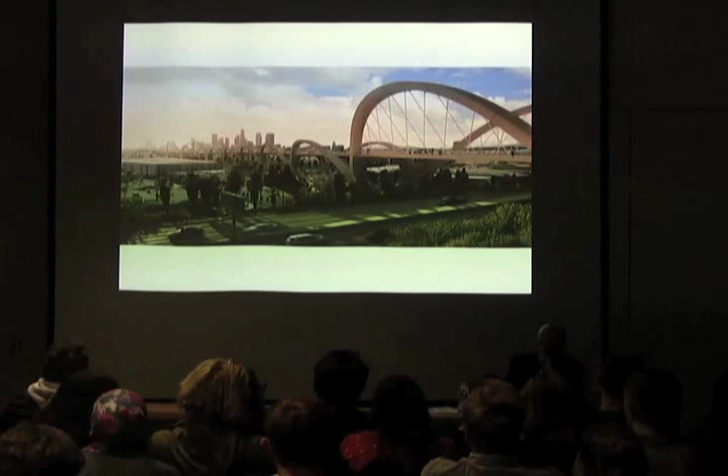The old bridge needs to be taken down because it was built with concrete using aggregate from the river, and over time that aggregate has had a very problematic, degrading effect on the reinforcing and the concrete itself. There's no saving the bridge.

What we started to think about in this bridge, what I was interested in, was certainly making a connection to the existing bridge, in this case quite literally through those arches, but to expand that, to create a kind of ribbon of arches from one side of the city to the other.

In a sense, we started to say that the crossing was no longer important, but what was important was the knitting together, or the continuation of one side of the city to another, to work against the silo-ization or separating effect that infrastructure often has in the city, and to use infrastructure here to move from a monoculture to something more of a multiculture, that takes on multiple responsibilities, tying the city together.

The bridge has a primary job, which is still to get cars from one side of the city to another, but also to get pedestrians and bicyclists from one side of the city to another.

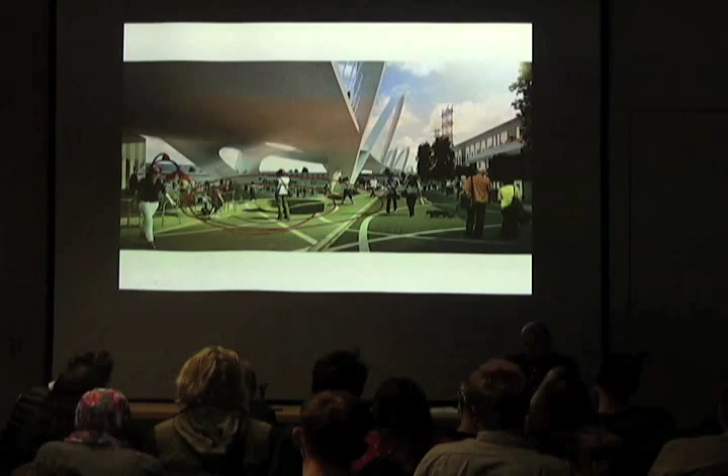And also in our project, to use many of the spaces that in the past the viaduct wasn't so concerned with, because it was the floodplain of the river, to start to use those as larger public amenities. Here is a new plaza on the Arts District side, which is already being programmed by a nonprofit to become very much a large hall, a civic and social hall within the city, to reinforce the restoration of the river by creating stronger access and visual promontories.

You can see the river from there, to give you a sense that the river is actually there. We take much of the land which will become extra property from the construction of the bridge, and turn that into a larger park, primarily for the east side, and make that park more accessible by additional structures—bike ramps, accessibility ramps, and also stairways up and over the arches.

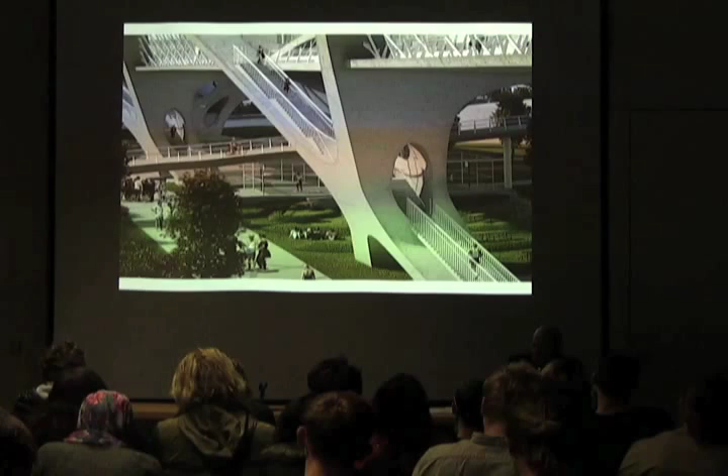And in that sense, this project and its attempt to take something as clear as a structural engineering project and start to produce greater complexity to that project, to make something as direct as the structuring of the bridge take on other responsibilities—to create connections not only horizontally from one side of the city, but also vertically, to begin to stack the different sectional activities in and around the site and be able to collapse them or tie them together—is a completely new type of responsibility, I think, for this type of structure in the city.

But I think it goes potentially even beyond that. In a very simple moment in the bridge, where the stairways come up and in a few places come up and over the arch, I think we're beginning to make the connection to what it means to make an icon in the city.

I think when most people say icon, they think of something visually very strong that you can see, you can take a picture of, that appears on postcards in cities. When we first started this project, I thought about structures like the St. Louis Arch, or the Eiffel Tower, or the Statue of Liberty. Each and every one of those projects is very different architecture stylistically, some modern, some not, but each and every one of them are structures that stand in for the cities in which they're located.

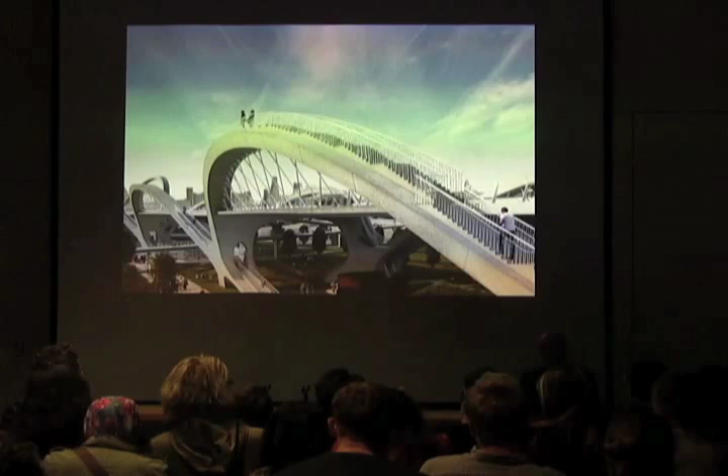I realized they were wrong because I picked those colors in Los Angeles light, and those colors were now living in a very different light—East Coast light, in Long Island City. It was a very instant, very hard, very direct lesson that the characteristics of place, the nuances of different places, are very real. At that point I started to believe that it's not that brick signifies building in one place or another, or that one material signifies your relationship to context, but that these other, more nuanced, more abstract characteristics are even more defining of the architecture and its relationship to those particular places.

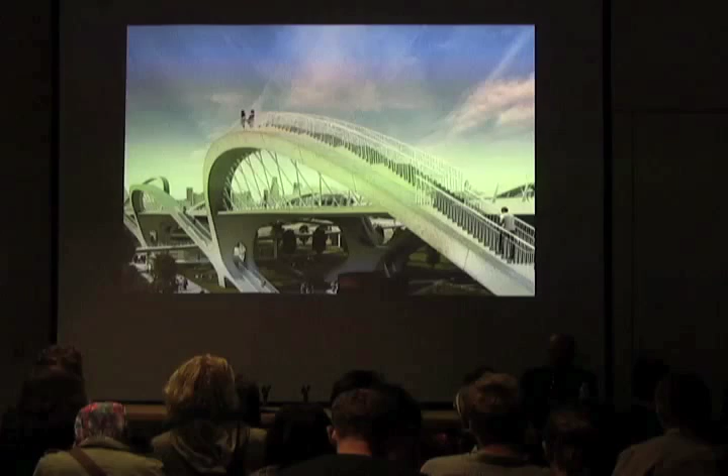And that, I think, has influenced directly both my fascination with things like color, and our constant questioning of how to approach that question.

That was a really long answer to one question.